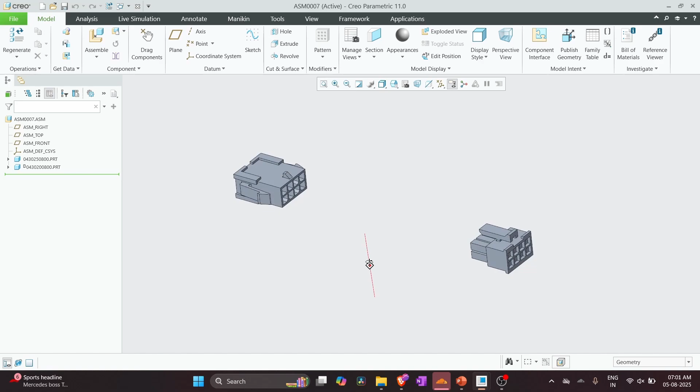In this lecture we are going to study what connectors are and what their types are, along with comparing a datasheet with its product. So let's get started.

For any type of connection to happen, there is always a need of a male and female connection. Whenever you use a charging cable for charging your phone, you will always require a cable along with a connector hole. So the cable is actually a female connector, and the mobile part which holds the other side is the male connector. Whenever these male and female connectors get mated with each other, a connection is secured.

In the same way, other connections are there. This is a normal three plug wall outlet which has a ground pin and line and neutral pin for AC connections. Only when this is inserted into the wall does the connection happen and the power flow happen. So it is very important for any type of connector to have both types of parts, male and female, mating with each other. It is called a male and female plug and socket.

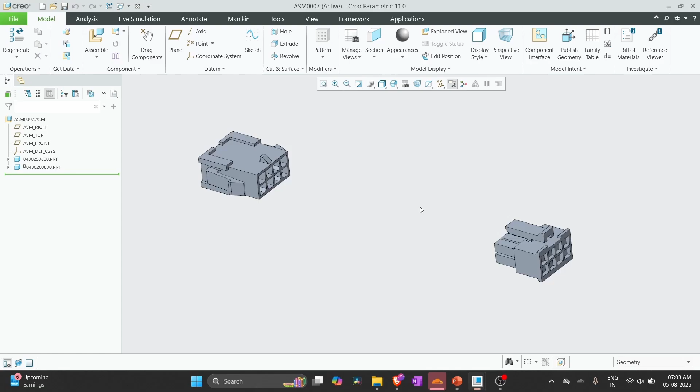So let's understand the other type of automotive connectors. Here we have an 8 pin connector, which is an 8 pin 2 row connector. This connector is from Molex, and as you can see here, the details are given as Micro-Fit 3.0, which is the series of the connector. Receptacle means female housing, dual row as it is two rows up and down, eight circuits means eight placements, along with the material rating which is UL 94V-0 and color black. The part number and serial number are given here.

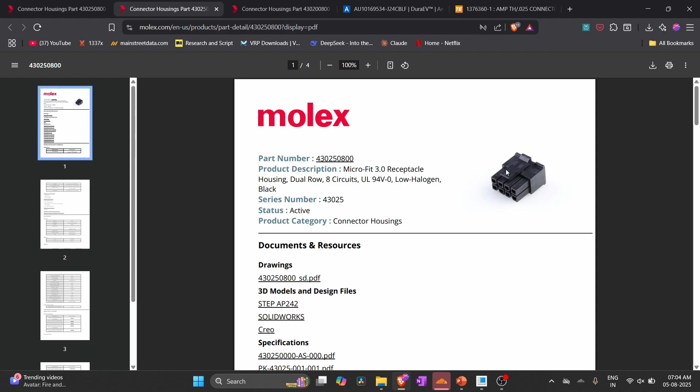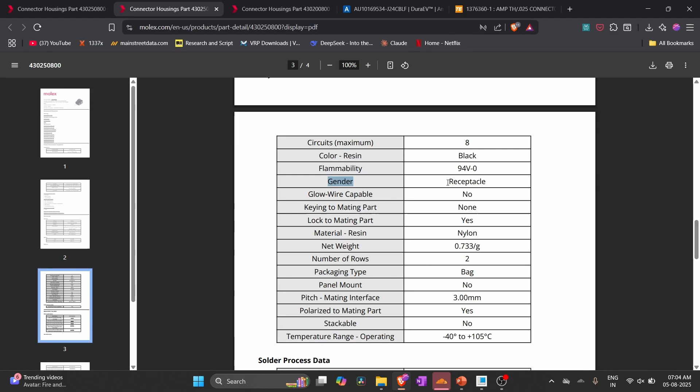Let's understand its datasheet. When we go on the website and click on datasheet, we get a PDF version of this connector. Here in this datasheet, every information for the connector application is given. All the drawings, STEP files, PDFs are linked. These are the physical parts of the connector. As we saw, number of connections 8, color black, gender means receptacle. This is female. A connector is male and female, so the gender of this connector is female, that is receptacle.

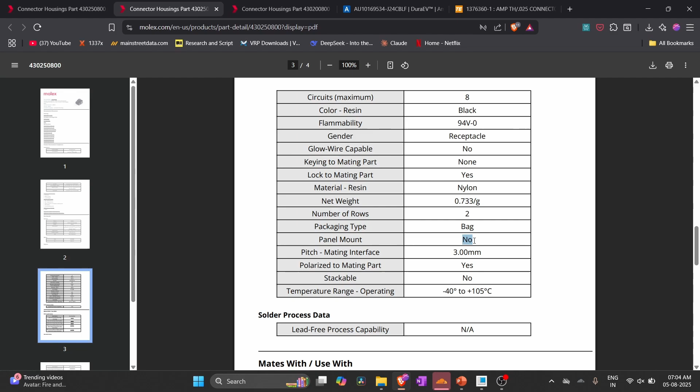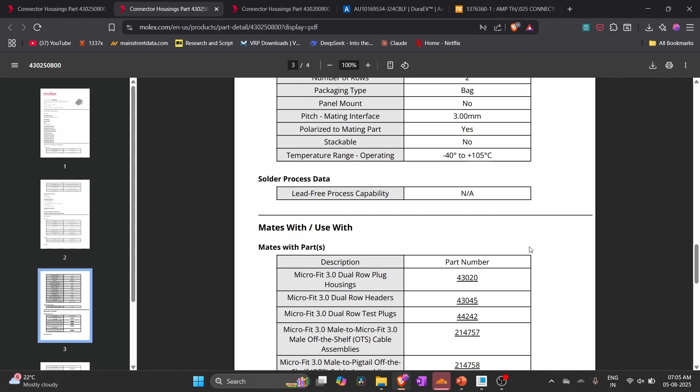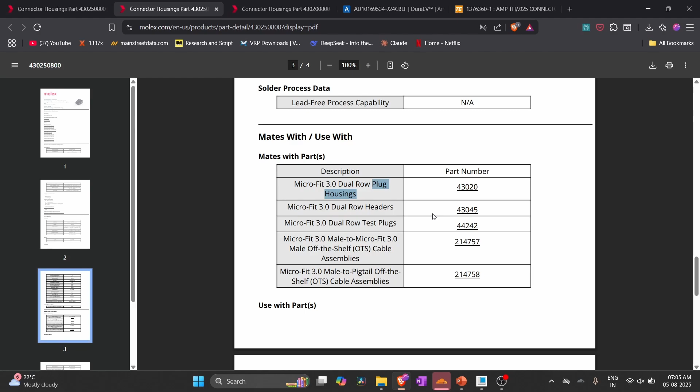This is the weight for it, number of rows. Is this a panel mount connector? No. This is the temperature range of the connector. Above and below this range, the connector is not suitable for that application; we need to use a different type of connector. Here are the mating parts for it. For this female connector, they have given their plug housing, that means the male connector, in this link. We will look at it after some time, and all the other accessories are given below.

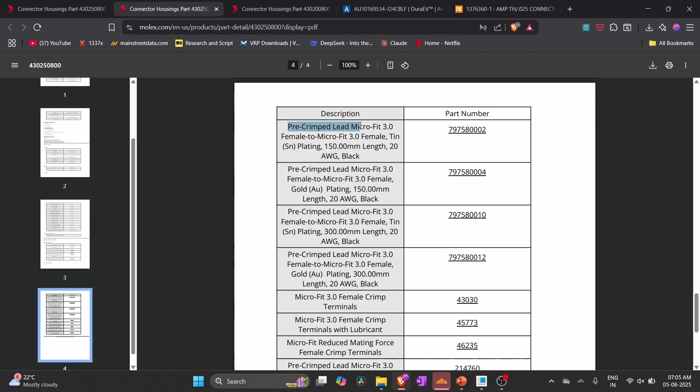These are the terminals, crimp terminals. These are female terminals for it. When we click here, we will get all the suitable terminals for securing these connections. This is also a female terminal. When you see this, the gender is given as female. As you can see, there is a hole on the front part of it; that's why it is called female. And this is the wire insertion part of the terminal.

The specifications for this terminal are 20 to 24 AWG. That means around 0.5 to 0.35 square mm size of wire will get mated with this terminal. So this is about the terminal for this female connector.

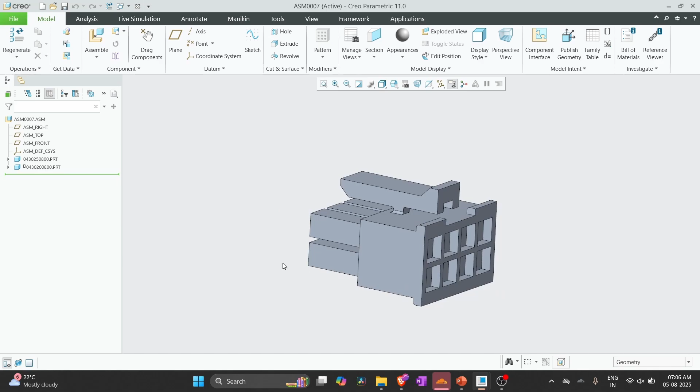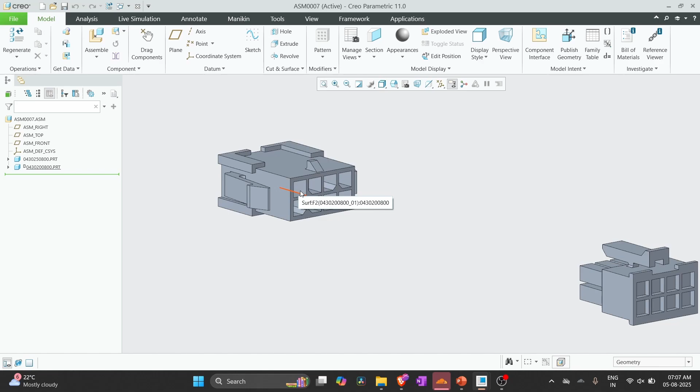Let's look at the other side of this connector, the male side. As you can see here, this is the other counterpart for that connector, which is a male housing. It also has to be the same: it has to be 8 pin and 2 row only. If this is a single row 8 pin connector, it will not get mated with this connector.

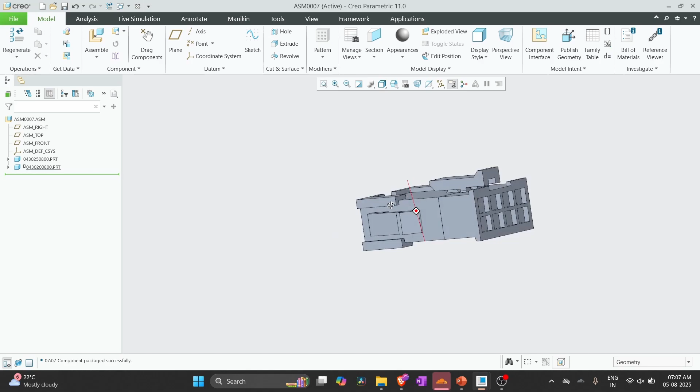So let's understand what mating actually means. This part and this part will get mated. As you can see here, both connectors are mated, and in this way the connection will happen.

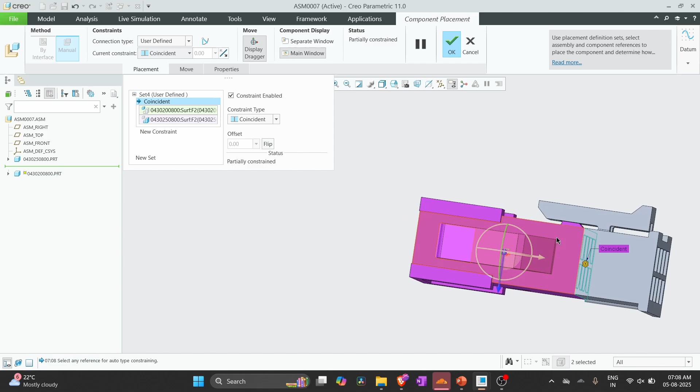So this is the male locking part of the connector and this is the female locking part. So whenever we insert them inside each other, the male and female get locked here due to this feature. And whenever this is done, the interconnect is secured.

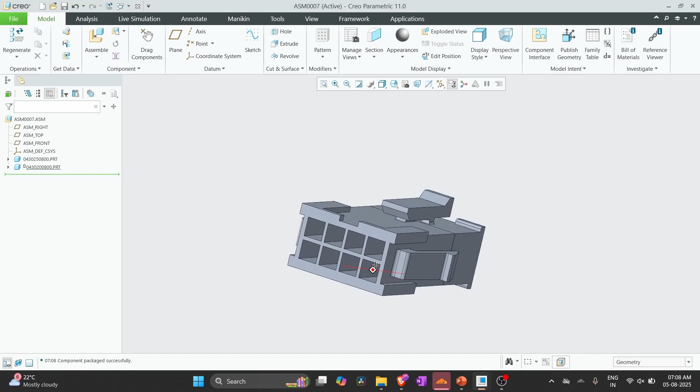This is the wire insertion part of the connector for this female connector, and this is the wire insertion part for the male connector. So in this way a connection is secured. This is a low voltage connector. So let's understand how medium and high voltage connectors look.

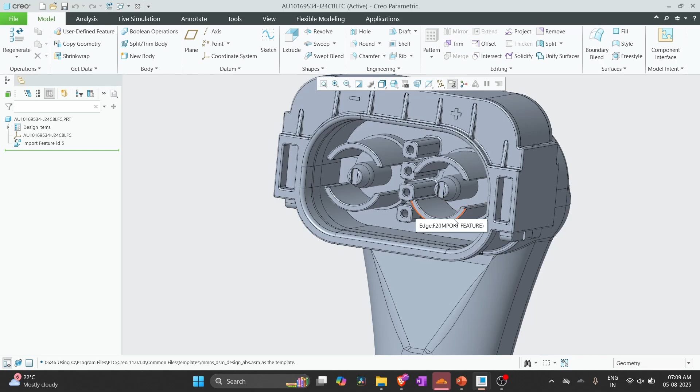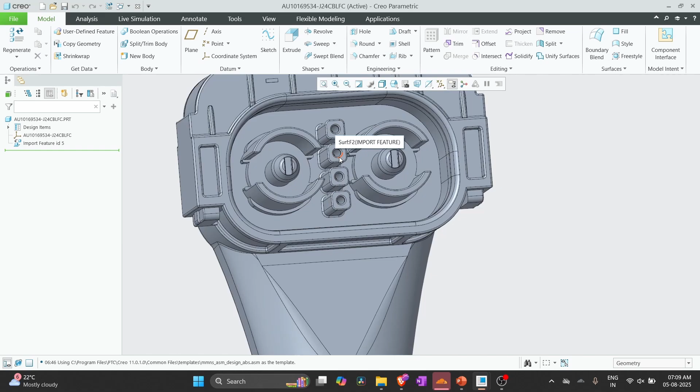So this is a high voltage DC connector from Amphenol. Here you can see terminals are given as plus and minus, and there are two pins. So this is a two pin connector along with wire, shown here. It also has four low voltage terminals which are here in a vertical manner. So as you can see, if we count total wires, 1 2 3 4 5 6, this is a 6 pin connector from Amphenol.

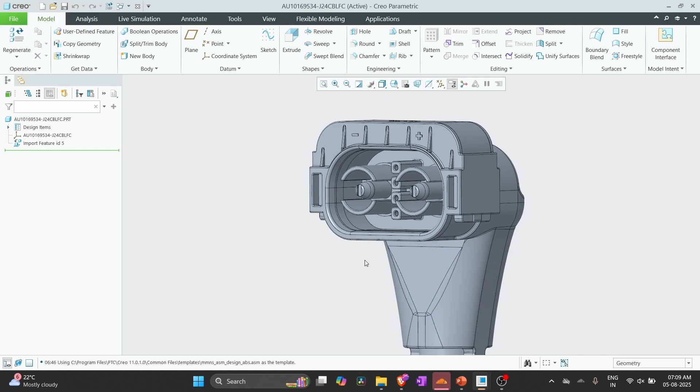This is usually used in vehicle connections. So in electric vehicles these types of connectors are used. These are totally waterproof connectors, and there is IP protection for this connector. Hence it is very suitable for use in the automotive industry.

So as you can see here, this is the actual image of that connector which we saw, and this is the datasheet for the same connector. So everything from price to its specifications is given. Number of contacts is given as 6. What we have here is 1 2 3 4 5 and 6. So the datasheet reflects the same information as the CAD file.

So number of contacts 6, color black, maximum current that can be applied through this connector is 70 amperes. This component type is a plug assembly, that means male connector. The dielectric withstand voltage is 500 volt AC. Gender is header, that means male.

Material contact is high conductivity copper alloy. So this is the material of the actual connection part. The terminal material is given here. As you can see, the gray part is the copper part which gets mated with the other side of the connector, that means the female part of the connector.

So the material housing is nylon 66. Operating temperature is -22 to plus 90 degrees Celsius, and the orientation is right angle. Right angle means this orientation. If the wire part was here in line with the connector, it would have been a normal connector. As it is bent, it is called a 90-degree connector.

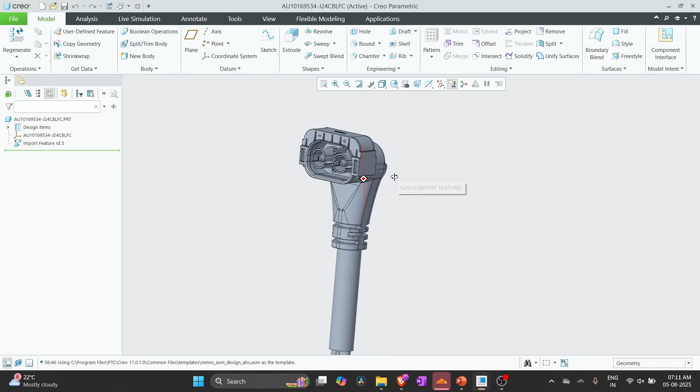So the pitch is 18 mm. The distance between two connectors is 18 mm. It may be between low voltage to low voltage or high voltage to high voltage. So this is the pitch of the connector. Plating is silver plating. As we saw here, the copper terminals are silver plated. That's why it looks like a silver type of connector.

So the resistance is 5 mega ohms minimum. Voltage rating is given as 120 volt DC. Voltage rating and current rating are very important for selection of this connector. Ideally the application should not be out of the scope of this voltage range as well as current range.

Wire size is given as 6 AWG. If you search 6 AWG in square mm, it means 13.3 or 13 square mm. So the wire size is given as this. So this is the Amphenol connector for electric vehicle application.

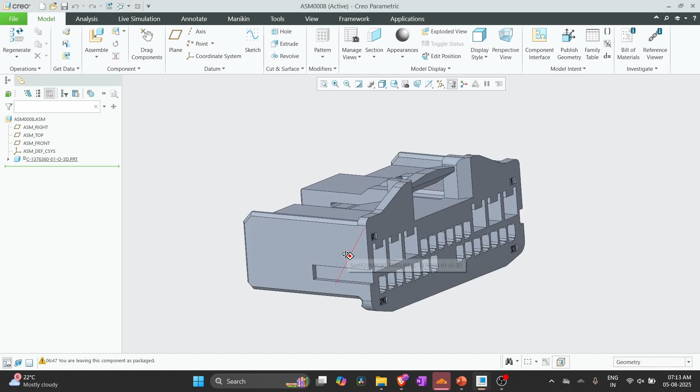Let's understand a low voltage connector. This is a connector from TE Connectivity, which is a major brand in the industry. The CAD file for this connector is given as this. The special thing about this connector is that it is a 26 pin connector and six housings are larger than the other housings. So with the help of this connector we can use small wires along with bigger wires in a single connector housing.

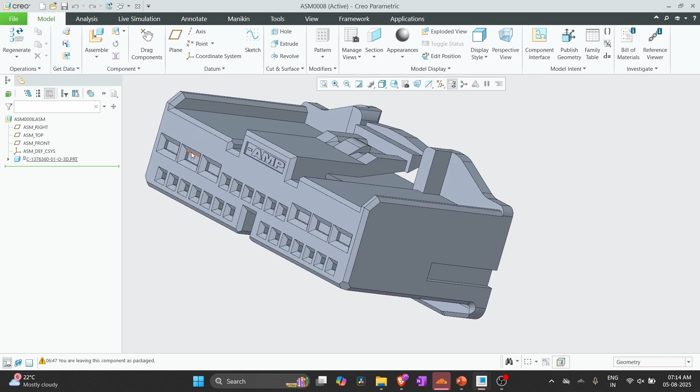So that is the advantage of this connector. In applications where, let's say, 2 square mm wire is used and applications where 0.5 square mm wire is used, a single housing can accommodate all the wires for securing the application.

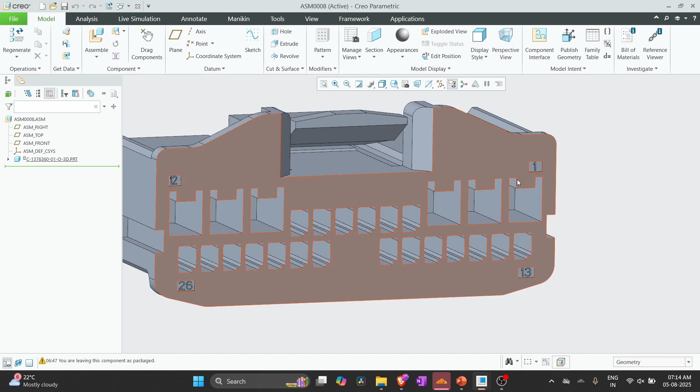So the pin numbers are given on the housing. This is the first pin, this is the 12th pin. After this is the 13th pin and this is the 26th pin. So there are total 26 pins on the housing and 6 pins are higher size than normal. So as you can see here, the information is given in this website.

Connector shape is rectangular. Mixed and hybrid connector. As we saw previously, there are two wire sizes, means higher and lower. That's why it is called a hybrid connector. Connector and housing type: housing, female terminals. Sealable, no. So this is not a waterproof type of connector.

As we saw previously, that is a waterproof connector as IP protection is given for it, and this is not a waterproof connector. So for applications where contact with water can be there, the connector is not suitable. Number of positions, as we saw, is 26 and 2 row. Operating voltage, as it is a low voltage connector, is given as 12 volts.

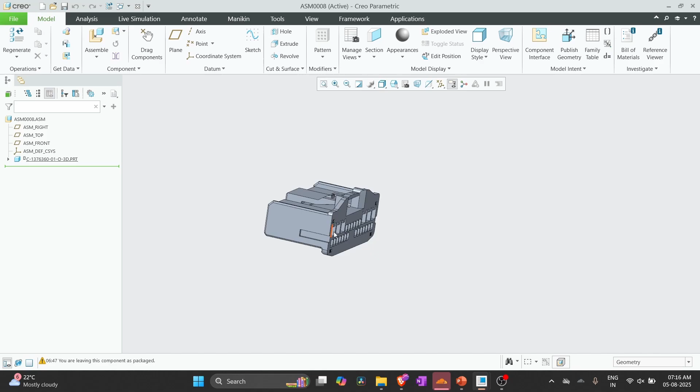Cable exit angle is 180 degrees. So as we saw, that was a 90-degree connector from Amphenol, and this is a 180-degree connector from TE. As the wire insertion part will be coming straight out of this part, in this orientation, it is a 180-degree connector. The primary color is natural, that is fine. Connector type is receptacle, that means female connector.

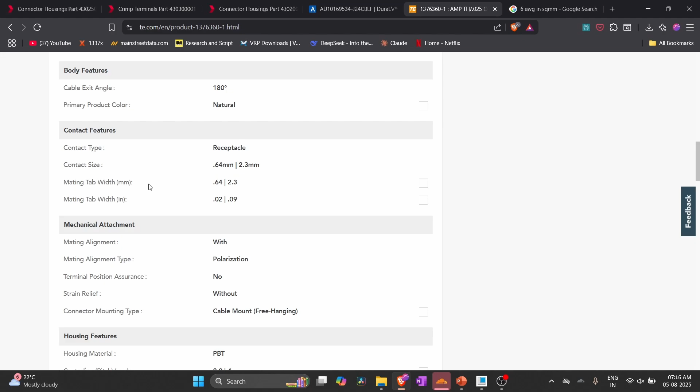Contact size: we can use 0.64 mm wire up to 2.3 mm wire. Mating tab: this is extra detail for the pitch and mechanical specification of the connector housings. Mating alignment with polarization. So these are the dimensions of the connector: the connector height 17.9 mm, length 39.3 mm,

and here is the operating temperature, -30 to 105 degrees Celsius, and max operating temperature is 105 degrees Celsius. So above this temperature, the connector is not suitable. Circuit application is for power and signal. So we can use this connector for power connections like DC plus and minus, and signal connections, meaning data. For connecting data, a very small size of wire is used, and this connector is suitable for both applications.

UL flammability rating means the material specification of the connector, which is UL 94 rated, and this is the shipping information: packaging method bag, packaging quantity 100, and others. So here we saw total four types of connectors: male, female. So this is a female. This is the terminal for that female connector. This is the male connector for that female connector. So this is one part.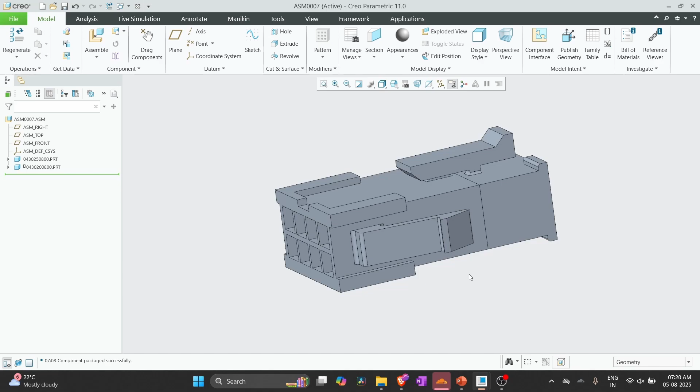So these are the main parts of understanding any type of connector. We will use multiple terminals other than this also during the design phase of the wiring harness. So yes, thank you for sticking along.